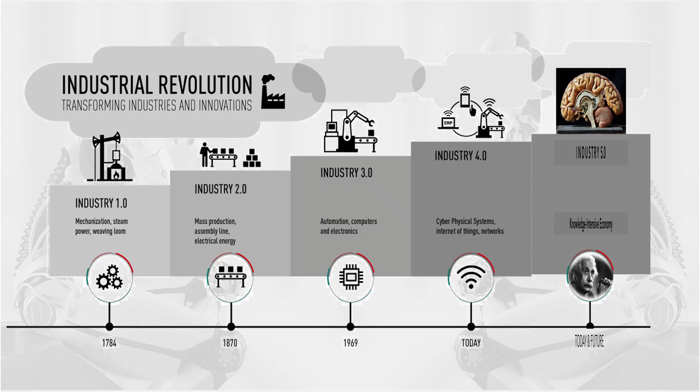Smart grids are a fundamental part of the knowledge-intensive economy. By organizing the types of economy and the dominant technologies, we have arrived at Industry 4.0. The main characteristic is that each era takes much less time to change than the previous ones. We could say that we are in a new era, Industry 5.0, dominated by artificial intelligence and the knowledge economy. It is the moment when social growth and the generation of wealth are in the hands of scientists.

The knowledge-intensive economy is an era foreseen by Peter Drucker in his book Post-Capitalist Society. The knowledge-intensive economy is another era, in which the main technology and raw material is knowledge. The traditional thing has been that these inputs are different. Knowledge is a very exclusive technology that is only in the hands of scientists, which means that, little by little, the skilled workforce is reduced to scientists, generating a workforce in which non-scientists lose value.

The machine used to produce knowledge is artificial intelligence, whose productivity grows over time. The time-discretized process must fulfill that knowledge in the period t+1 is an exponential function of knowledge in t, which means that, in the infinite period, knowledge will be infinite. This situation can result in a singularity in which humanity cannot process the knowledge it produces. In 2014, IBM estimated that companies in the energy and utilities sector which used big data and analytics reported 23 times higher productivity than those that did not.

Smart Grids Framework. The concept of the smart grid does not have a single creation date, but is the result of a technological evolution that was consolidated in the mid-2000s. The key milestones of its origin are: 2001, the Electric Power Research Institute, EPRI, in the U.S., formally proposed the idea of a modernized grid that would integrate information and control technologies. 2001 to 2002, the Telegestore project was launched in Italy by the company Enel, considered the first large-scale commercial deployment of smart grid technology in homes, installing millions of smart meters.

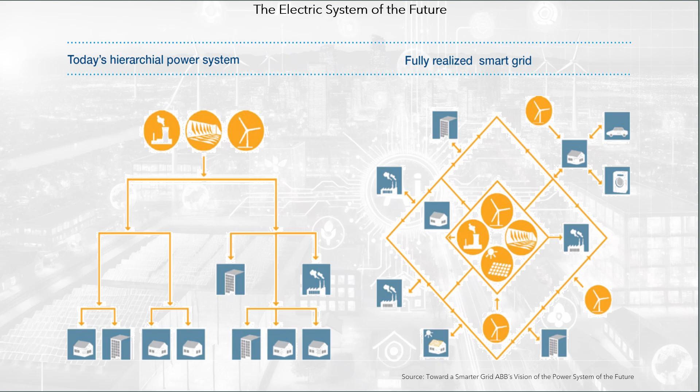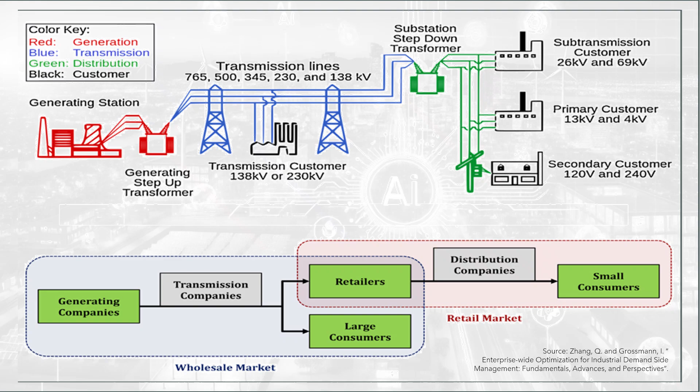in a regulated environment, generation, transmission and distribution are operated by a vertically integrated company, usually a state-owned enterprise that has a monopoly on the supply of electricity. On the other hand, in a deregulated environment, different parts of the electricity grid are owned by different companies, most of them private, and the electricity markets provide a platform that fosters competition and active consumers. Due to the new power technologies, this liberalization of the electricity market has reached the industrial factories that must face this new opportunity. The diagram presents the parallelism between the physical and commercial systems.

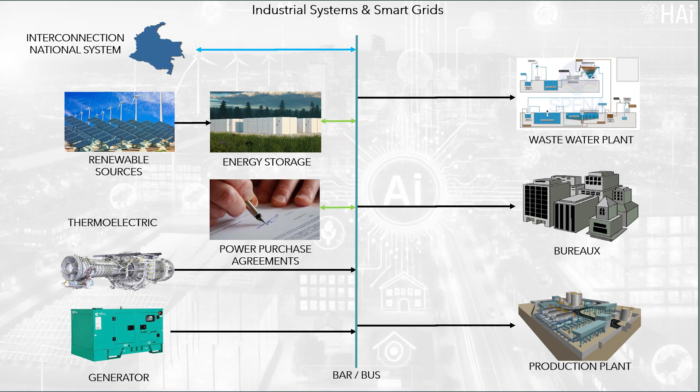The diagram shows what an old power supply system might look like. A modern energy supply system is impacted by new power technologies, and by advanced analytics, artificial intelligence, machine learning, and large-scale mathematical programming. Smart grids optimization models. Each smart grid requires a specific decision support system that allows the operator to interact with the entire electricity system. Starting from the original electrical system, a wholesale electricity market.

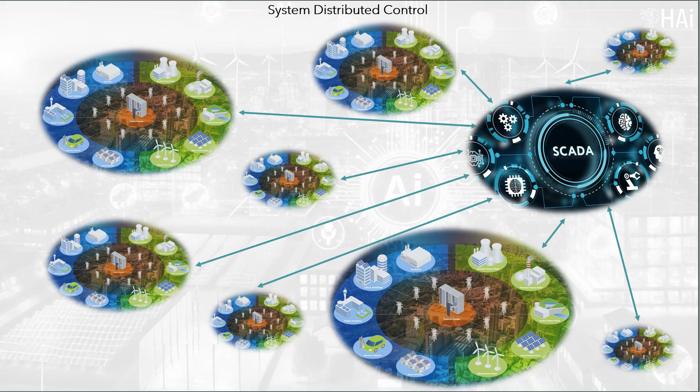Smart grids were advancing little by little, initially seen as isolated systems. Currently, these electrical systems must coexist and interact with each other. The centralized control of the system focused on the development of assets, hardware and software, for the wholesale electricity system. The emergence and development of smart grids generates a distributed control of the system, in which many islands, which initially operate in isolation, must be coordinated.

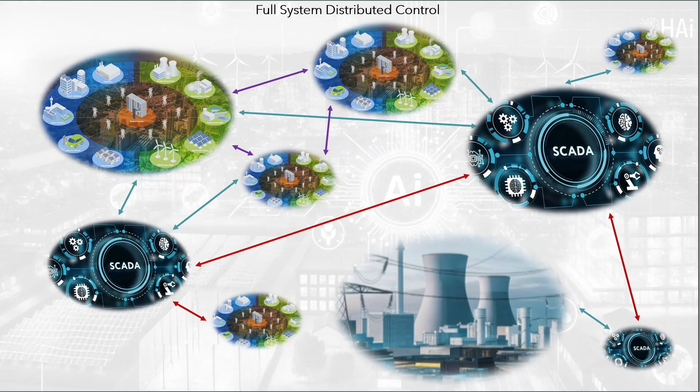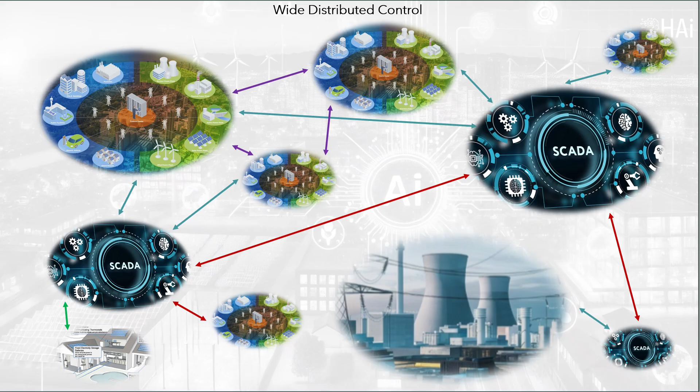Technological evolution has given rise to total distributed control, in which multiple types of electrical assets coexist and communicate with each other. Smart grids have generated communities of users that consume and generate energy and require a broad control system that unites all the production-consumption cells that the electricity system has. It is a system like the Internet, where the autonomous communities share physical resources and communicate with each other, which gives greater power to the physical system, but requires more advanced artificial intelligence to manage it.

A fully distributed approach for economic dispatch problem of smart grid. In the traditional power grid, power is transported from a few central generators, such as thermal power plants, hydroelectric power plants, etc., to a large number of users, and the traditional power grid focuses on electricity generation, transmission, distribution, and control. Recently, new renewable energy generators, such as photovoltaic systems, wind turbines, etc., have been used to offer an alternative

form of electricity production. In addition, the demand for electricity is diversified and the traditional electricity grid is insufficient to overcome the current challenges. Now, the smart grid, SG, is used to improve the reliability of the electrical system by allowing it to be controllable and automated. The deployment of sensor technology and smart meters has accelerated the development of the SG.

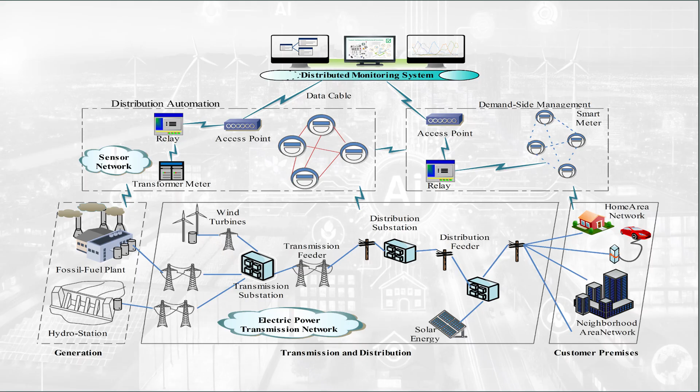Data communication network infrastructures include wide area measurement systems, WAMS, sensor and actuator networks, SANETs, home area networks, HANs, neighborhood area networks, NANs, and wide area networks, WANs. Different communications media, wired and wireless, can be used for data transmission between smart meters and electric utilities. SANETs can be grouped under a hierarchical structure based on HANs, NANs, and WANs, as shown in the figure.

The information security issues of distributed economic dispatch. Depending on the structure, the economic dispatch system can be divided into the centralized model and the distributed model. The centralized economic dispatch system has advantages such as simplicity and efficient operation. When the number of distributed generator sets, DGs, is large, the centralized economic dispatch system has low reliability and robustness, high construction and maintenance costs, a high computational load on the dispatch center, and the inability to meet DG usage and plugging needs. Therefore, the requirements of stable control and optimized system operation can no longer be met.

Compared to the centralized economic dispatch system, the distributed economic dispatch system features decentralization, greater reliability and scalability, lower communication burden, and greater robustness and privacy. The DGs in the distributed economic dispatch system can make decisions independently, perform necessary information interaction with others through the communication network, and cooperate with each other to complete the economic dispatch task. In the distributed economic dispatch system, the topology of the communication network changes from the star shape in the centralized mode to an arbitrary connected graph. Intelligent agents cooperate with each other to complete the tasks of information collection, processing, computation, and decision.

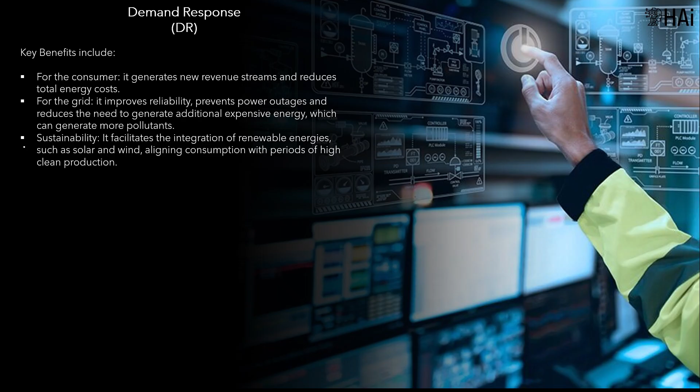One of the goals of demand response, DR, is to reduce the peak load that occurs at certain times of the day in certain regions and lasts from minutes to hours. The peak is characterized by a rapidly increasing load in real time and requires quick response from generating resources that are more expensive to operate.

AMI and CS applications are expected to greatly enhance the effectiveness of demand response on reducing peak load. Reducing load during peak load periods is a key tool for optimizing system assets. The smart grid will enable DR to be applied more broadly across the system, but to achieve the desired levels of peak demand reduction, many policy, technology, education, and market information objectives must be implemented in states and regions.

The demand response strategy: smart meters allow customers to choose variable prices depending on the time of day. By looking at the true cost of energy, consumers can respond accordingly by shifting their energy consumption from periods of high price to periods of low price. This process can have the joint benefit of reducing costs for typical consumers and decreasing peak demand for utilities.

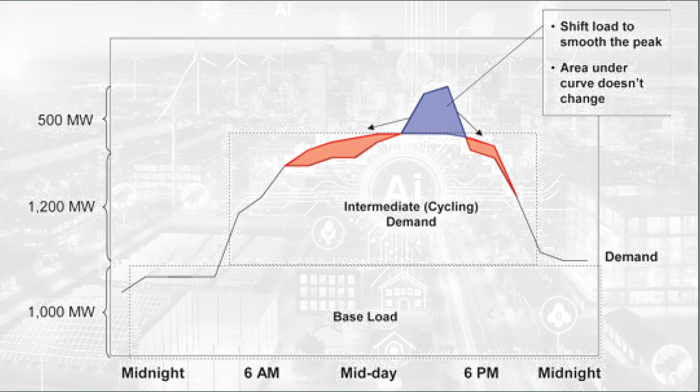Information and Communication Technology, ICT, is necessary for the integration of smart grid applications to take full advantage of its functionality for asset optimization purposes. ICT applications address this weakness by deploying service-oriented architecture, with an enterprise-level information bus that allows all related applications and communication technologies to interoperate, so that users have access to integrated processes. Key to this functionality is a data warehouse to manage and host the large volumes of data that come from numerous sources.

ICT integrates two types of communication systems. Wide Area Networks, WAN, are large-scale telecommunications networks that interconnect devices and local area networks, LAN, across long distances, covering cities, countries, or even continents, and Field Area Networks, FAN, are communication infrastructures designed to interconnect industrial devices and sensors over large outdoor areas, acting as the critical bridge between field devices and control centers.

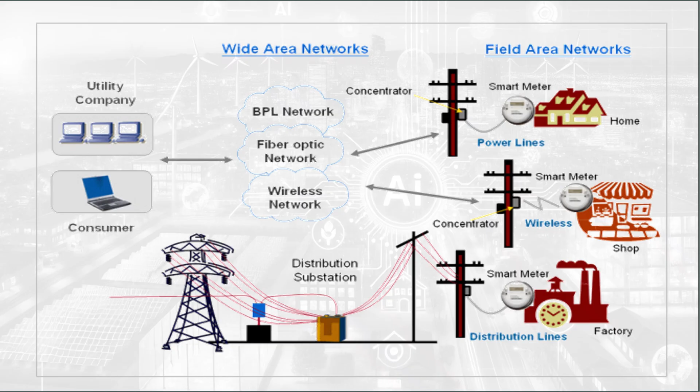Distributed energy resources, DERs, and the smart grid are expected to encourage the deployment of much larger numbers in the future. DER offers a significant opportunity to optimize assets as they are called upon to contribute to the generation mix and support demand response. The challenge will be to efficiently and effectively operate this large number of distributed and diverse resources. DER operation is expected to be accomplished through two processes: Distribution Management System, DMS, and Microgrids Operation, MOP. Both are expected to assist grid operators to integrate DER operations to improve asset optimization of grid assets and operate more efficiently.

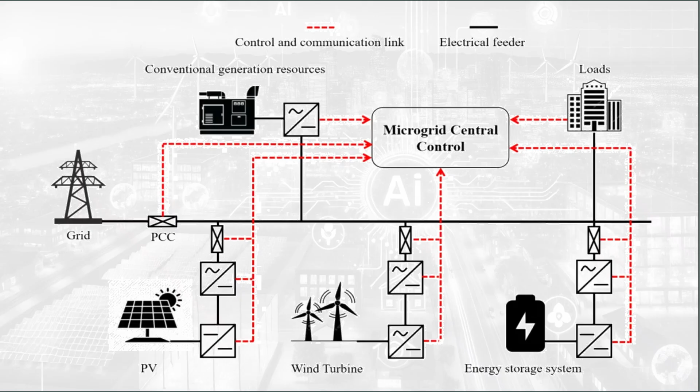In 2010, the Department of Energy, DOE, established the following description of microgrids. A microgrid, a local energy network, offers integration of DER with local electric loads, which can operate in parallel with the grid or in an intentional island mode to provide a customized level of high reliability and resilience to grid disturbances. This advanced, integrated distribution system addresses the need for application in locations with electric supply and/or delivery constraints, in remote sites, and for protection of critical loads and economically sensitive development.

Distributed energy resources and microgrids operation. Along with utility microgrids, a new consumer system type application has recently emerged, the community microgrid. Community microgrids represent a new level of intelligence and control methodology aimed at creating small areas of control that optimize local assets around community objectives. As the complexity of local infrastructure grows, the microgrid provides the intelligent applications needed to achieve local goals.

Microgrids operate in conjunction with the main distribution network most of the time, and only occasionally transition to an island operation. This occurs fluidly when community objectives are challenged in such a way that the intelligence of the microgrid determines that the community would be better served economically, reliably, or environmentally as an island. When the challenge is overcome, the microgrid seamlessly returns to grid-connected operations. The community microgrid is continuously looking for the optimal solutions to meet its objectives.

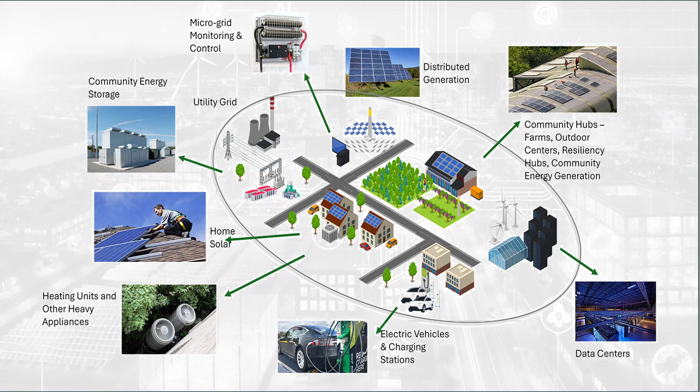Microgrids operating in a cellular structure can simplify the operation of these new resources and allow them to be optimized around the most important objectives for local consumers. Multiple microgrids integrated with a distribution management system, DMS, can simplify and optimize the operation of the distribution system and provide another method to improve its efficiency. Community microgrids become an important part of the system, as they are points of accumulation of a large amount of demand and, now, of electricity generation.

A Combined Heat and Power generator, CHP, or cogeneration system, produces electricity and useful thermal energy, heat or cooling, simultaneously from a single, typically on-site, fuel source. By capturing heat that is normally wasted in conventional power generation, these systems achieve over 80% efficiency, compared to roughly 50% for separate heat and power, significantly reducing carbon emissions.

Advantages and disadvantages. Advantages: high energy efficiency, 65 to 80%, reduced carbon footprint, lower operational costs, and increased energy independence. Disadvantages: high initial capital investment, requirement for regular maintenance, and the need for sufficient physical space for installation.

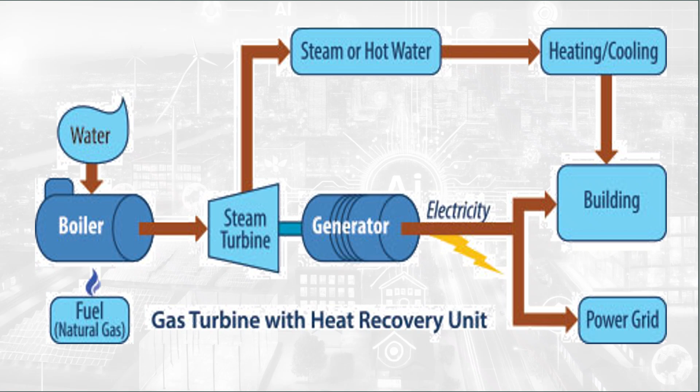Common technologies used in CHP systems include reciprocating engines, combustion turbines, and steam turbines. They can be configured to operate in parallel with the grid or in island mode, providing critical backup power.

Home energy management (HEM) schemes, emphasizing their critical role in the smart grid's consumption side. Its primary goal is to make electricity consumption smarter and more efficient through systematic coordination of appliances and local distributed energy resources (DER). The main benefits are reduced electricity bills, decreased peak demand, and decreased peak average ratio (PAR).

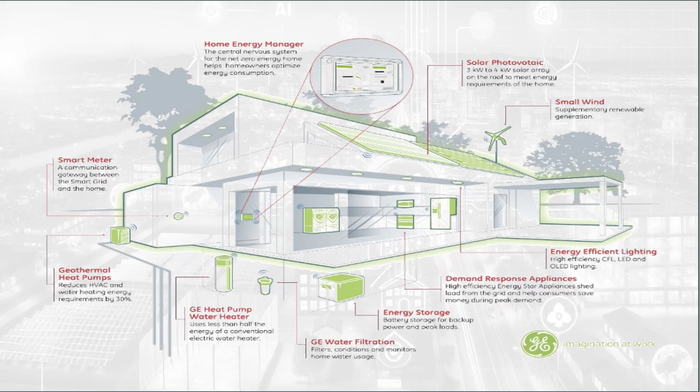Pricing schemes are based on the analysis of tariff models such as real-time price (RTP), time of use (TOU), inclined block rates (IBR), and critical peak price (CPP). HEM schemes are categorized into two types: communication-based and optimization-based. The diagram shows the distribution of the equipment in a HEM system.

Regional transmission organizations, RTOs, independent system operators, ISOs, and distribution system operators, DSOs, provide the global authority for the movement of energy. Their role is to optimize transmission and generation assets from both reliability and economic perspectives for the large transmission system footprint they operate. They economically dispatch the generators located in their footprint, monitor and analyze reliability on a near real-time basis, and provide the market mechanisms that will ultimately encourage consumers to participate in the electricity markets.

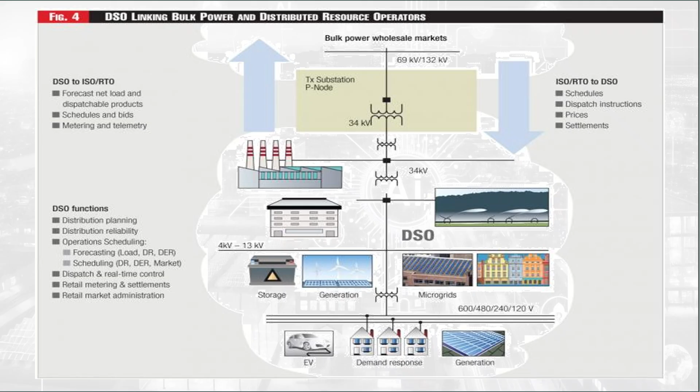Integration of smart grid applications at the distribution level with these applications would enable the transmission system to utilize the distribution system as an asset to further optimize transmission and generation assets and their operation. Operators have learned a lot by implementing their reliability and economical dispatch programs. The integration of their experiences, processes and technologies with smart grid technologies and applications has opened new opportunities to optimize both transmission and distribution assets.

Some of the services provided by RTOs, ISOs and DSOs include Security Constrained Economic Dispatch, SCED, Locational Marginal Pricing, LMP, markets, day-ahead forecasting and scheduling, ancillary services, regulation services, reserves, demand response capacity bidding, etc.

Wide Area Monitoring Systems, WAMS, the North American SynchroPhasor Initiative, NASPI, is a project to provide real-time monitoring of the nation's bulk power system. Wide Area Situational Awareness, WASA, new visualization tools to improve grid management automation and situational awareness, thus improving reliability and efficiency, and new system analysis tools, applications that support short-term and long-term planning, what-if analyses, and other analytical tools needed to support optimal operations.

For decades, one of the key places to add intelligence to the power grid was the substation, primarily at the transmission level. After demonstrating the value of sending intelligence to substations, utilities established long-term transformation plans for their substation fleet. Substation automation, SA, provides critical transmission-level information to support the analysis and optimization of transmission and distribution assets.

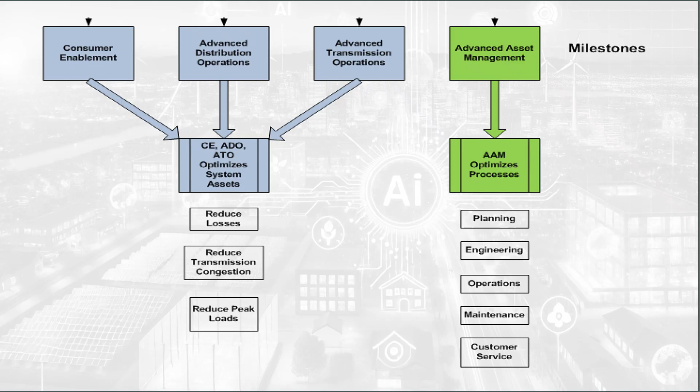Smart grids. Optimization. When smart grids were created, their importance was compared to the Internet, and that it could give rise to new Googles and Microsofts. History was right. Customer engagement and the integration of new technologies are the key features. With network optimization, we can find the perfect balance between reliability, availability, efficiency, and cost. Network optimization spans from generation to transmission and from distribution to the end user. All of these are based on key smart grid technologies, namely integrated telecommunications and sensing and measurement.

Key characteristics of smart grids: enabling informed participation by customers, enabling new products, services, and markets, accommodating all generation and storage options, providing the power quality for the range of needs in the 21st century economy, optimizing asset utilization and operating efficiency, addressing disturbances through automation, prevention, containment, and restoration, operating resiliently against various hazards.

The transformation from the traditional grid to a smart grid is based on grid optimization. Develop the perfect balance among reliability, availability, efficiency, and cost. Demand response and demand-side management. Incorporate automated mechanisms that enable utility customers to reduce electricity use during periods of peak demand and help utilities manage their power loads. Advanced utility control. Monitor essential components. Enable rapid diagnosis and precise solutions. Energy storage. Add technology to store electrical energy to meet demand when the need is greatest.

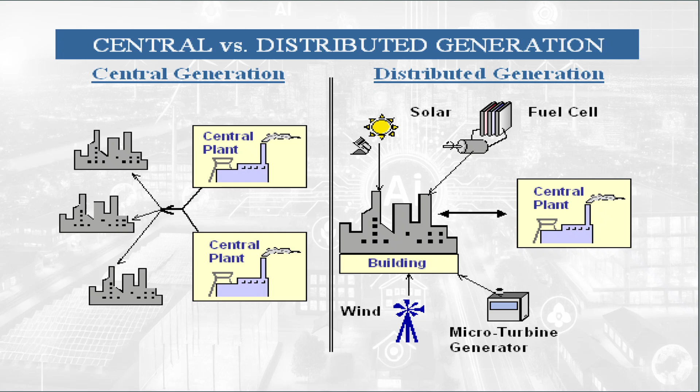Home area networks allow communication between digital devices and major appliances so customers can respond to price signals sent from the utility. Renewable energy and distributed generation sources reduce greenhouse gas emissions, provide energy independence, and lower electricity costs. Distributed generation sources: small scale, usually in the range of 3 kilowatts to 10 megawatts. Examples: wind turbines, solar systems, photovoltaic and combustion, geothermal energy production, and fuel cells.

Distributed generation sources. Small scale, usually in the range of 3 kilowatts to 10 megawatts, examples, wind turbines, solar systems, photovoltaic and combustion, geothermal energy production, and fuel cells.

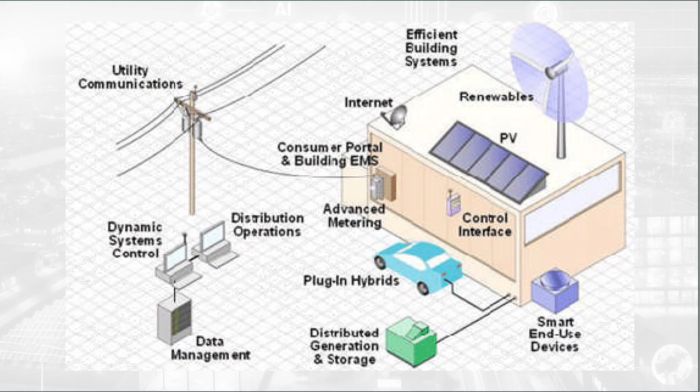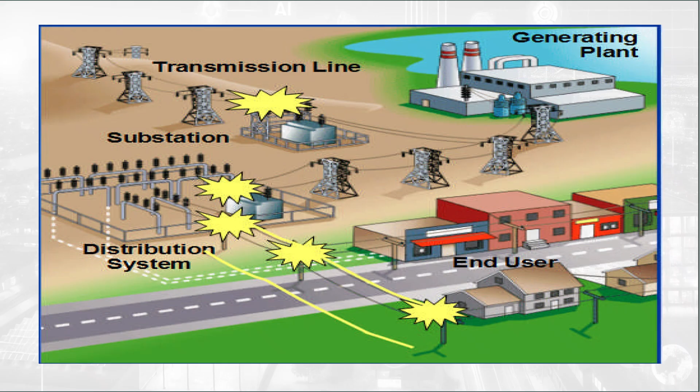Benefits: shift load from peak hours to off-peak hours. Improve asset utilization of existing infrastructure, reduce investment required for new power plants, reduce investment to increase transmission and distribution limits. Transfer lower costs to end users, improve power quality. Frequency regulation: with fast spinning reserve, about 10 minutes, grid energy storage can quickly meet the increased demand. Voltage control: grid energy storage supplies reactive power too, which helps maintain satisfactory voltage profiles.

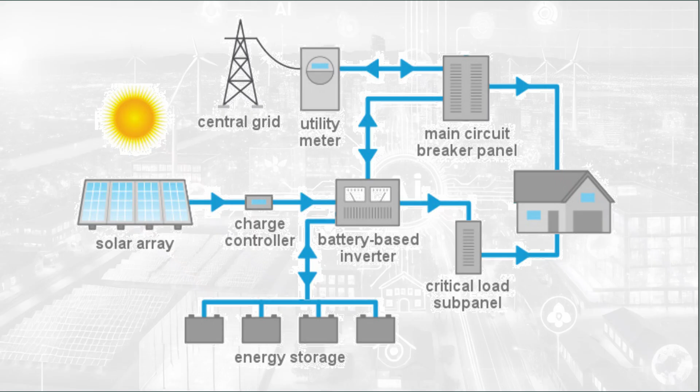Smart grid optimization is about making the power grid the best it can be. It's necessary to find the perfect balance between reliability, availability, efficiency and cost. To improve the utilization of current infrastructure and defer investments in new generation, transmission, and distribution facilities. To reduce the overall cost of delivering power to end users. To improve the reliability of the power grid. To reduce resource usage and emissions of greenhouse gases and other pollutants.

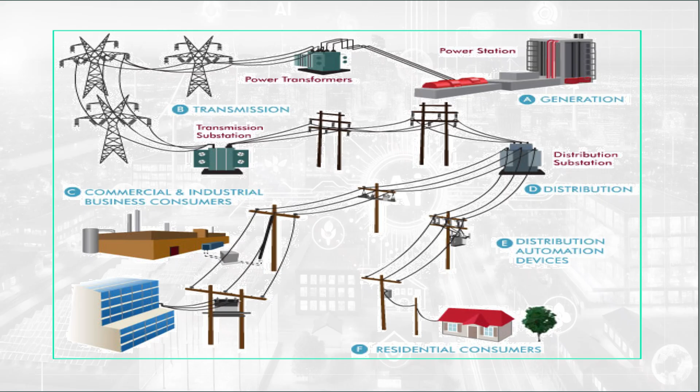The facts are: optimization techniques have been used in the electrical industry. Many known optimization issues include unit commitment, voltage control, and feeder configuration. In general, optimization has been applied from electricity generation to end use.

Decision-making artificial intelligence, DMAI, is the engine that transforms conventional electricity grids into smart grids, enabling the transition from a unidirectional flow of energy to a dynamic, bidirectional, and self-adaptive system. The pillars of DMAI address three critical challenges in managing smart grids. Demand and load forecasting: deep learning algorithms analyze historical patterns, such as weather and user behavior, to predict demand peaks with greater than 90% accuracy, avoiding overloads.

Integration of renewable energies: DMAI compensates for the intermittency of solar and wind energy by optimizing power distribution and the use of energy storage systems, based on advanced weather forecasts and complex optimization algorithms. Demand-side management: automated systems incentivize users to shift their consumption to off-peak hours through dynamic real-time pricing, achieving cost reductions of up to 20 to 30%. HAI-POWER smart grids optimization.

Hypothalamus artificial intelligence, HAi: engineering projects for companies in the process of digital transformation. It presents its solutions and professional services based on decision-making artificial intelligence, designed to optimize planning and operation in organizations in the electric and gas sector, using mathematical models as a service. This enterprise-wide optimization system, EWOS, is called HAI-POWER. The video introduces the detailed features of HAI-POWER. HAi has more than 50 years of experience solving problems for companies in the energy sector using models based on decision-making artificial intelligence.

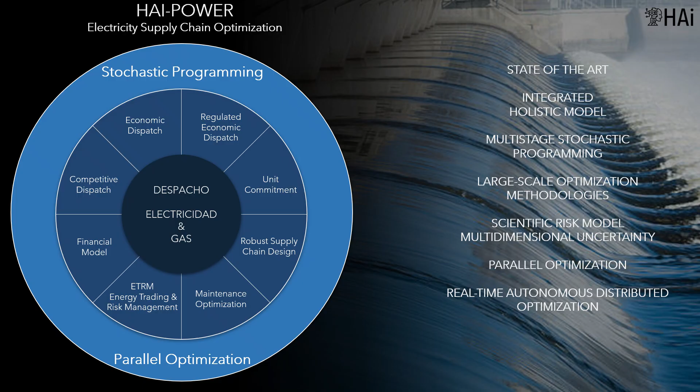Any of the models can be run in their deterministic or stochastic version, making use of asynchronous parallel optimization. HAI-POWER is a decision support system that has been developed to support the decision-making processes of agents participating in the electricity and/or natural gas markets.

HAI-POWER is composed of a set of optimization models that describe the supply/demand process of electricity and natural gas. From this point of view, it determines the partial equilibrium point of the electricity and gas markets under conditions of economic efficiency.

Smart grids are the future of the electricity sector. Its impact is of immeasurable dimensions, considering the impact of the Internet. Smart metering measurement systems are the way to collect large volumes of information, big data, necessary to capture the added value of this new dimension. Demand has become an active agent, leaving aside the passive position it has maintained until now. The mathematical models used to optimize large power grids need to be revised considering this new environment.

HAI-SGO, Smart Grids Optimization, corresponds to a set of mathematical models aimed at supporting the decisions of the agents participating in smart grids. It is made up of the following models. Optimization of demand response, optimization of electrical energy management in building complexes, such as universities, housing estates, shopping centers, etc. Optimization of energy efficiency, optimization of electrical energy management in industrial systems intensive in energy consumption.

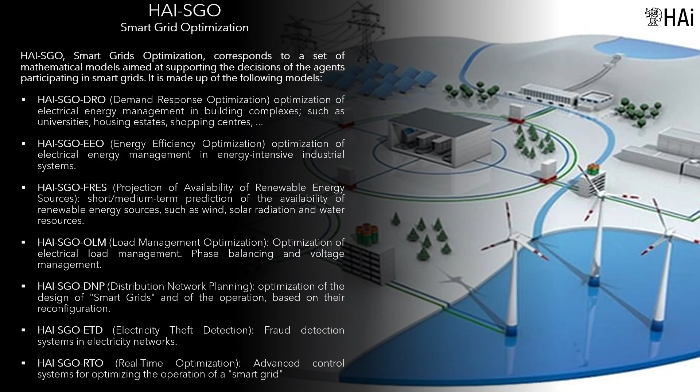HAI-SGO is composed of forecasting models and optimization models aimed at supporting the decision-making of electric agents in smart grids, optimization of the economic and technical aspects related to smart grids in electricity companies. Demand response for buildings and/or housing, optimization of energy management in facilities, such as universities, shopping centers, office buildings, homes, urbanizations, and small towns. Industrial energy efficiency, optimization of energy management in heavy industries intensive in energy consumption.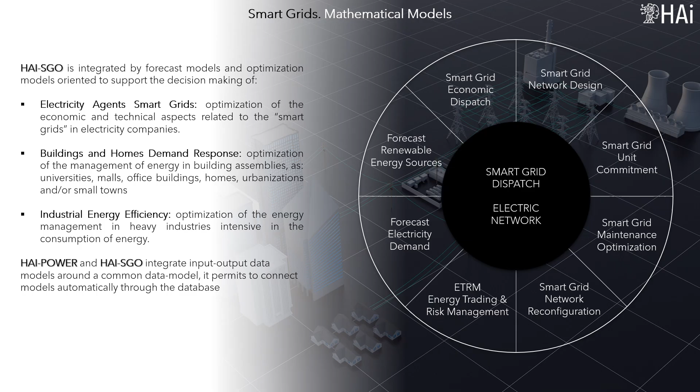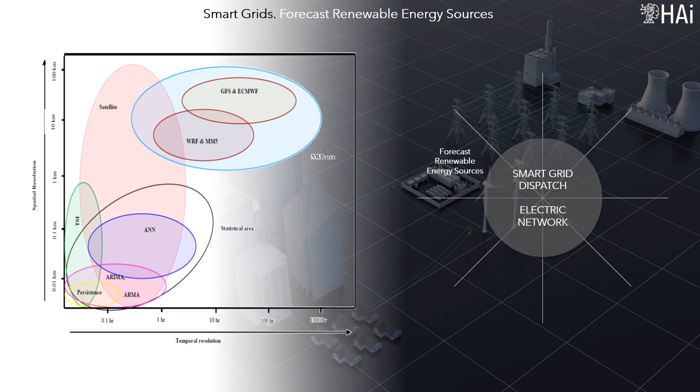Forecast of renewable energy sources. They correspond to predictive analytics models focused on prediction at the specific sites where the generation plants are located. Models are also affected by the timing of the prediction. Forecast of energy demand. Long run: demand projections per weeks, energy and maximum power. Medium term: demand projections per weeks, located in medium areas. Short term: demand projections per days or hours, located in specific installations. Real time: demand projections per fractions of hours, located in specific installations.

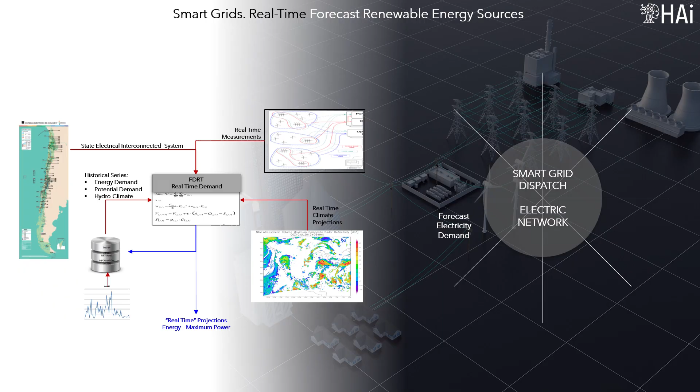HAI-SGO is integrated by the following optimization models. Economic/regulated dispatch of the smart grid, optimization of the management of electrical energy in small cities, factories, universities, shopping centers, office buildings, urbanizations. Smart grid unit commitment, short-term optimization of the electrical load in real time. Smart grid reconfiguration, optimizing the network topology; it considers voltage control, configuration of feeders, location/activation of electrical assets, transformers, capacitors, and phase balancing.

Smart grid design, optimization of the design and/or redesign of smart grids with modern power technologies. ETRM, energy trading and risk management, decisions to buy and/or sell electricity in a long, medium, and short-term market, one day in advance and the day of dispatch.

Industrial energy efficiency. The technical-economic viability of energy storage coupled with the proliferation of energy technologies based on renewable energy sources has changed the landscape of the industrial sector, since it is now possible, and increasingly efficient, to generate renewable energy and store it for use in due time. This implies the tendency to standardize the marginal costs of generation around an average value for all periods and all the nodes of the electricity grid, capturing the benefits that this entails.

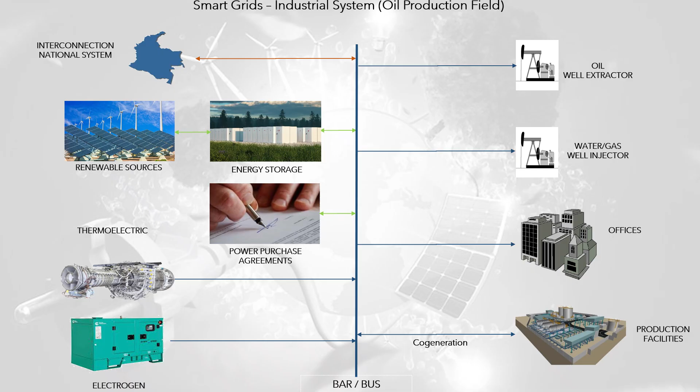In practice, all industrial companies can be agents that interact in the electricity market, since it is possible for all to act as co-generators and carry out commercial activities and transactions. This, together with the Industrial Internet of Things, increases the pathways to achieve industrial energy efficiency. Industrial energy efficiency results from the integration of production processes, transformation of matter, with industrial energy services, energy transformation, aimed at the simultaneous optimization of both industrial production and energy conversion that is related to polluting emissions of gases and liquids, associated with increasingly demanding environmental control laws.

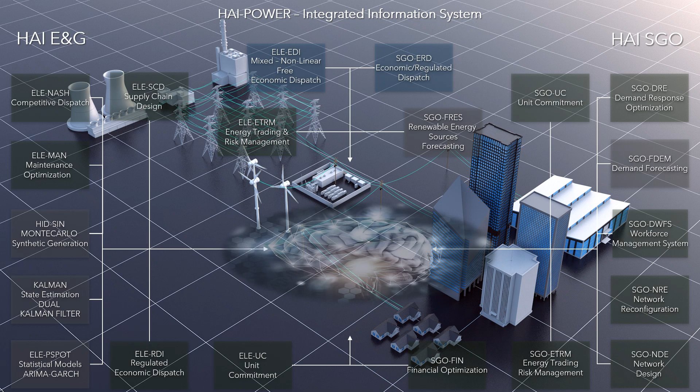The HAI-POWER and HAI-SGO models can be integrated with complex industrial process models, in which it is necessary to redesign the power supply system according to the new power technologies. This type of model includes the simulation of polluting processes, for example, combustion in furnaces, to determine the optimal mixture of fuels in accordance with environmental regulations. HAI-POWER and HAI-SGO integrate the models and information systems around a common data model, allowing models to be connected automatically through the database or through RAM memory, integrating them as an artificial hypothalamus for an electricity company of wide coverage.

Remember, all science as it grows toward perfection becomes mathematical in its ideas. Alfred Whitehead. Thank you very much for your attention.